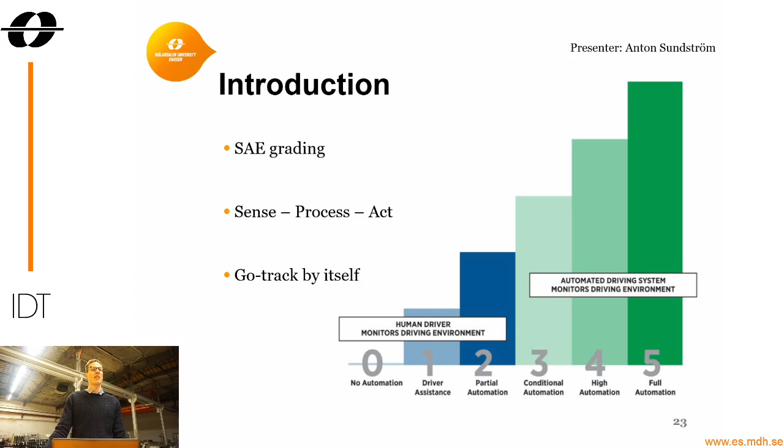We wanted to create an autonomous car that was able to travel alongside a go-kart track autonomously, powered by solar energy. The platform is based on the MDH Solar Team's solar car from 2019. The MDH Solar Team is a student-driven project where they, for a 2-year period, develop a solar electric car, which they then compete with in the Bridgestone World Solar Challenge.

But how did the MDH Solar Team come to be in an IDT robotics project? Well, Volvo Group, who is the largest sponsor for the MDH Solar Team, had a sponsorship requirement that their solar car was to be autonomous or self-driving. But as MDH Solar Team did not have enough time to develop their own autonomous system for the car, they needed a solution in order to develop it.

And so me and my colleague Tim, who's in the crowd over here, spoke to MDH management and the Department of Innovation, Design and Technology for MDH in order to make this project happen. And that's why we're here.

The design of the car is in many ways similar to the actual solar car. So the body, the wheel proportions, how the wheels are placed, and the maximum steer angles of the front wheels are identical to the real car. This is in order to easily migrate the autonomous system from our miniature car to the real solar car in the future.

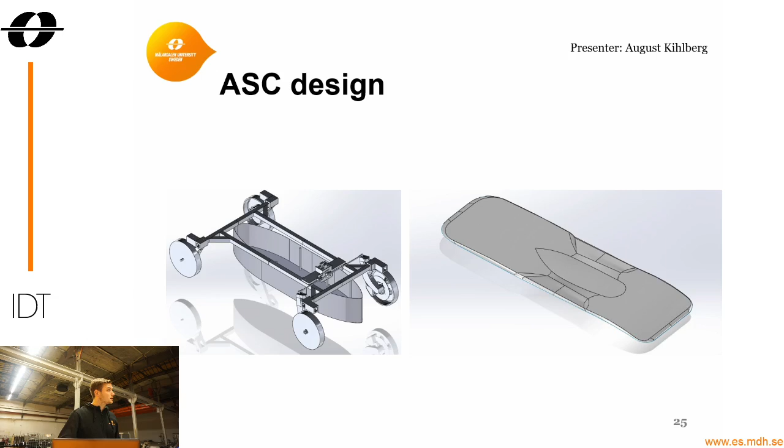The cockpit, which is the canoe-looking thing on the left picture here, is made out of a plywood plate in the bottom with acrylic sheets on the sides, and it's where we hold the majority of our components. The body, which you can see in the right image, is a vacuum-formed polycarbonate sheet of plastic. So it's an entire polycarbonate sheet. And that's it for the design.

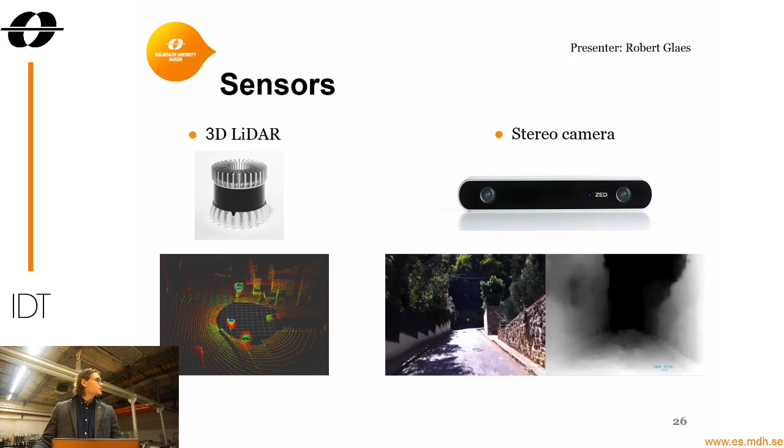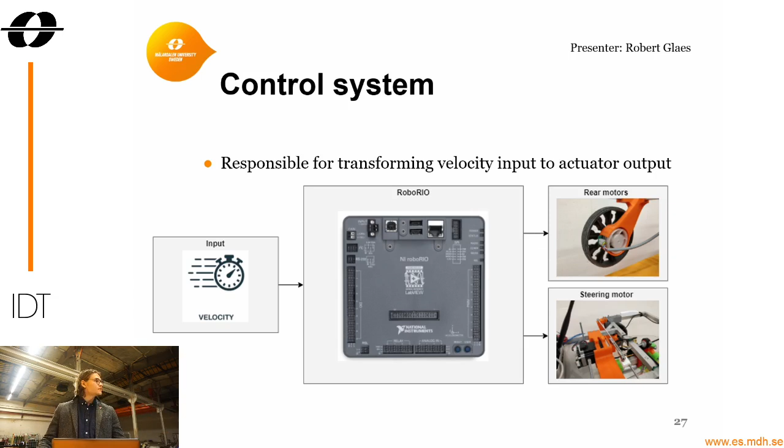It takes this data and it processes it and it transforms it to our 2 main actuators, that is our rear motors, which drives the velocity, the speed of the car, and our steering motor, which drives the 2 front wheels of the car. So this is the main control system.

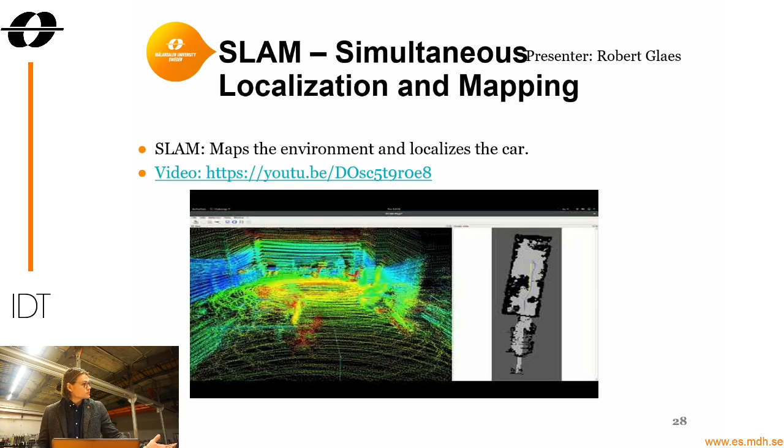So this is the creation of the map. For the localization, which happens simultaneously, you look at the movement, something called the odometry of the car, and you match the scans and the map and other sensors in the car, IMU for example, to match what you think your position is in this map. So now we have a map of our unknown environment and we know our position in our environment.

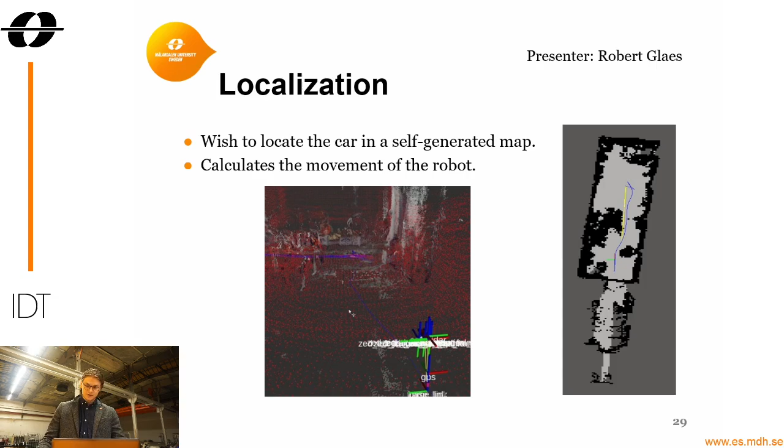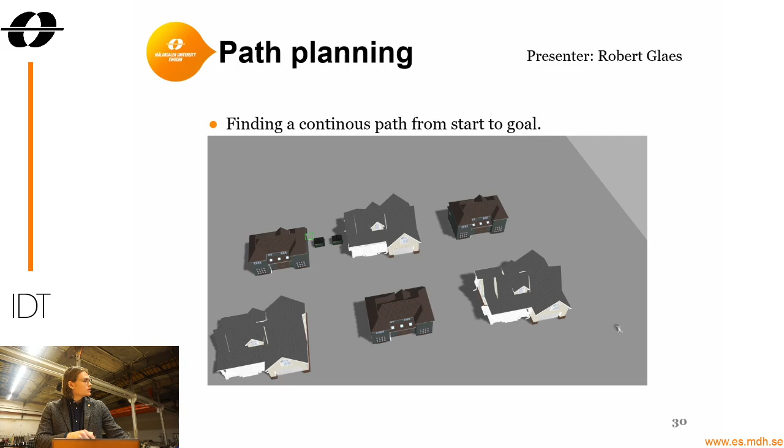So when we path plan, we can put a goal right here by the dumpsters between the house, and our path planner will create what's called a cost map, which is a map where obstacles have higher values, which means the car will want to avoid them. So you can see the continuous path created from the car to the goal position, and you can see it avoids these costly areas, which are obstacles it wants to avoid in its path. All right.

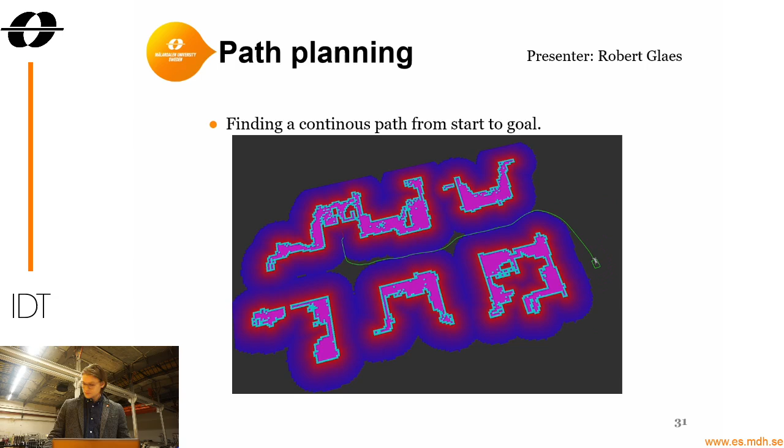Yes. So for the result, we wanted to demonstrate and show one of our test cases. And in this scenario, we have our car in one side of the room, and it has a path that it wants to travel to the other side of the room. So initially, it sets a path that follows the... let's see if we can show. Okay. That follows the road. So here is a top view of the road, where the blue edges are the edges of the wall, and it plans the path just to go straight to the goal.

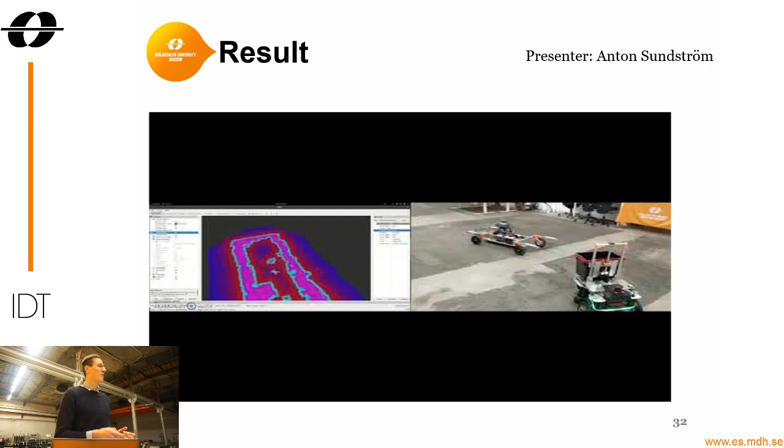So future work for the autonomous car would be to implement road detection. So right now we are setting the goal of the robot somewhere that we have mapped. But for future work, if it is able to identify where the road is, it can plan these points that they travel through by itself. And it also requires some additional systems to be used in traffic, for example, sign recognition and some way to handle oncoming traffic. For the next iteration of the project, we strongly recommend to empower the driving capacity, which can be done with the motor controllers and the motors.

And as you've seen, we have lots of systems for the autonomous car, and we have spent lots of time with it, and there are even more that we are keen to explore.